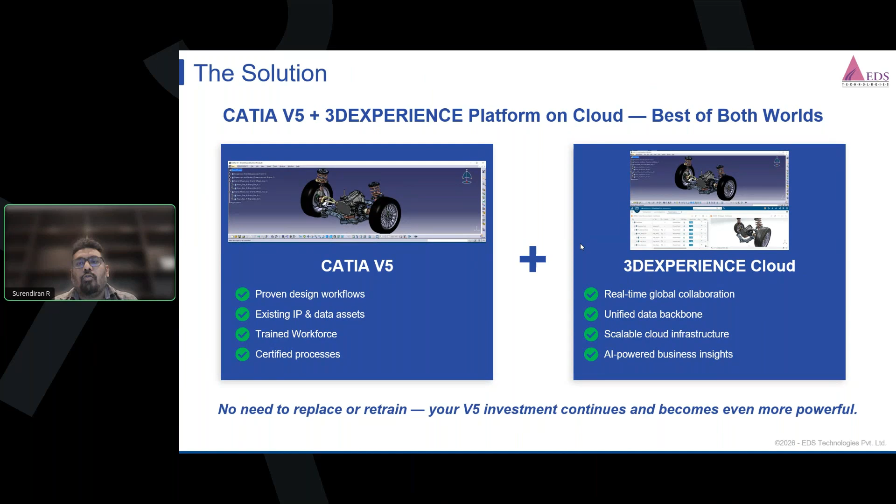Rather, what happens is you currently have only CATIA V5. You're going to make sure you have the best of both worlds, combining CATIA V5 and the 3D Experience platform on the cloud. So there are five key business value pillars I would like to highlight here - why you should connect your CATIA V5 to the 3D Experience platform, and the business impacts and outcomes you're looking at.

So when you want to do a real-time co-design across sites, across suppliers, or across customers, or even within your teams, directly within CATIA V5, you can basically bring a single system, ensuring that you will have unified data rather than working in silos.

And of course, in terms of your process optimization, like your design reviews, approval process, your change management, all these elements are embedded within the platform, making sure that your work is increased in terms of 3x speed.

Next, if you want to understand traceability - a lot of data is built every day in your company. You need to understand the level of traceability you have, how you protect and manage your IP. All these elements are well managed on the cloud, eliminating version and revision chaos. You can understand who has done what, and who has ownership of the data they've built. So completely, you have 100% data traceability on this platform.

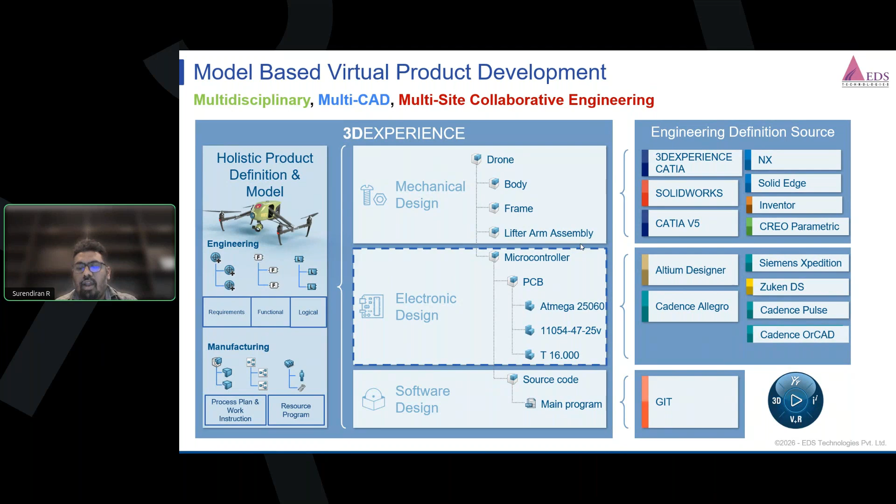So as I emphasized about connecting multi-CAD applications to the platform, what do we call this strategy on the 3D Experience platform? As I said, to have a collaborative engineering definition, that is having a unified BOM. So all these applications are connected to the platform through a power-by strategy.

We have already built-in connectors. What you have to basically do is that today you already have the connector for CATIA V5 within your CATIA V5 with cloud services license. If you want to integrate any other CAD applications along with CATIA V5, you just have to have these connectors.

I believe you might have got some information about what CATIA V5 does with 3D Experience Cloud. Now, before we get into a use case demonstration, I want to show you a short video about what CATIA V5 does with 3D Experience on cloud.

In this segment of video, you'll be seeing how you can save and revise your data with the cloud services. If you see here in this video, you can discover the capabilities of the platform.

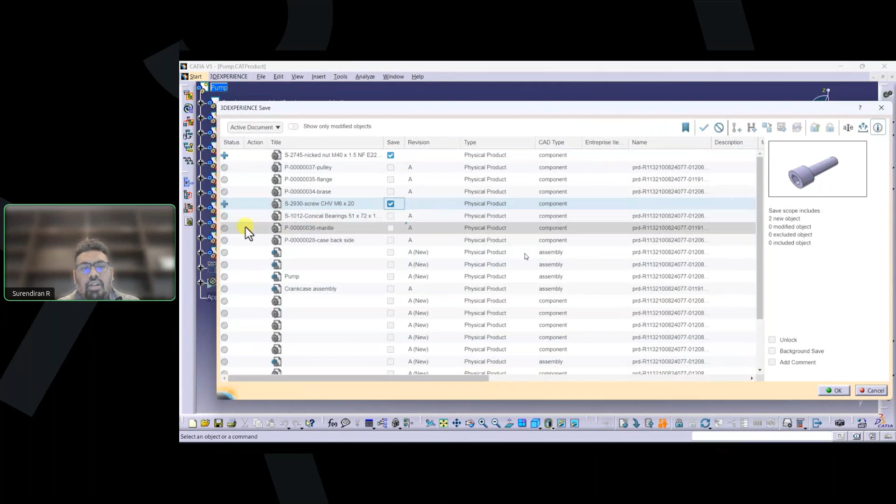If you want to save this file to a particular location, you can organize it to a dedicated folder as well. You can create a structure hierarchy of folders, select the files whichever you want, and save it instantly. It will be automatically saved to the cloud, and you will have live synchronization as well.

What basically happens is that whatever you're sharing or saving from your standpoint, the other designers connected to the platform will automatically be able to see everything.

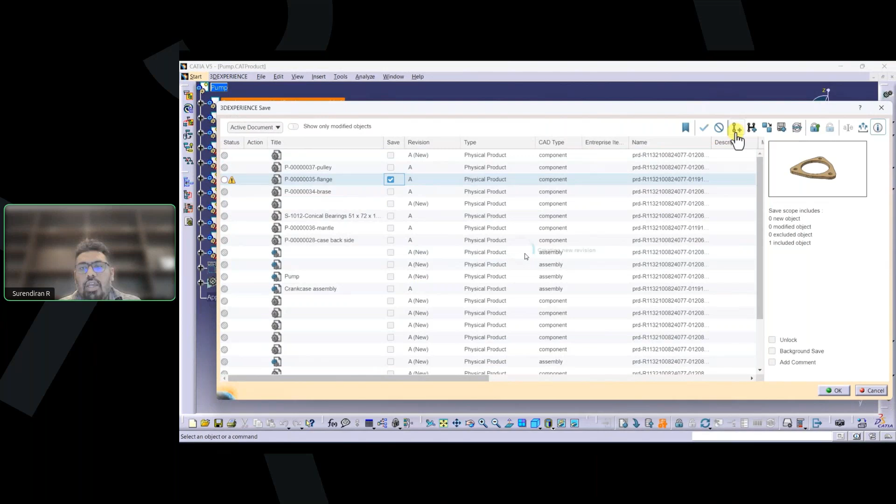Here, if you see, you can also create new revisions. So once you want to create a new revision, rather than having multiple files in your local computer, you can have new revisions here itself, and you will have a maturity life cycle as well. If you want to freeze it for approval, you can do that. You can release it, and do all these kinds of elements on the 3D Experience platform.

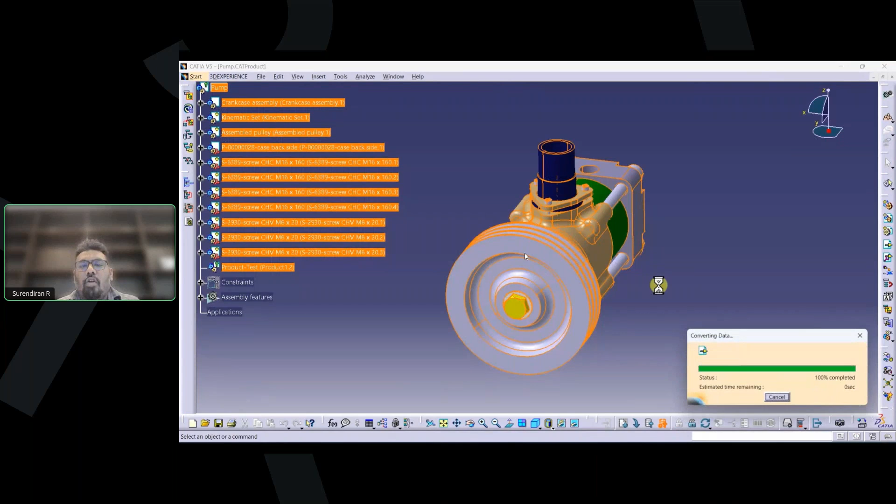It also enables you to avoid duplication of files. You can lock the files while you're editing, and unlock them when you're sending them back to the database. This will also enable you to generate derived outputs such as STEP, IGS, CGR, which is required to be shared with your suppliers.

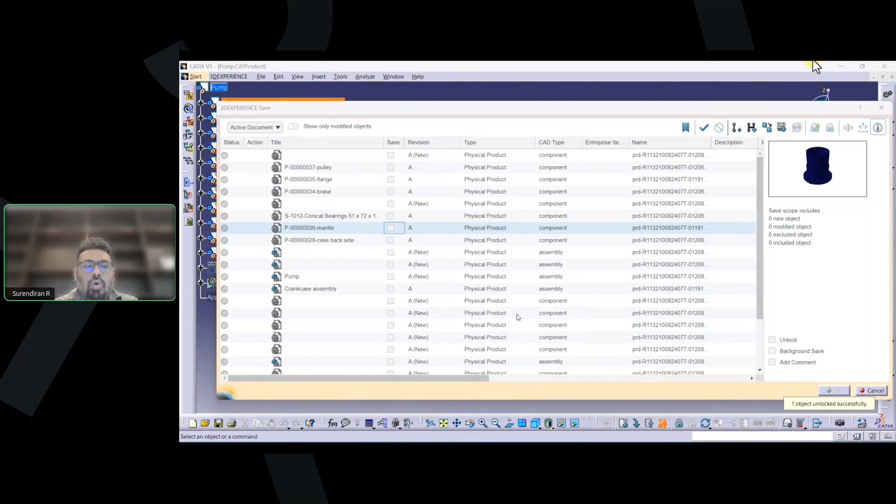Once you save this, you can see the progress of the file getting into the platform, and you'll have a message stating that all files are saved accordingly. While you see here, this is how the interface remains. It will be beneficial for you to work on the platform, and you can save all the files here to the 3D Experience platform as well.

But when you want to search and open a product, whatever you've done in CATIA V5, in local computers it will be hard for you to retrieve information. Whereas here, we have a powerful semantic search.

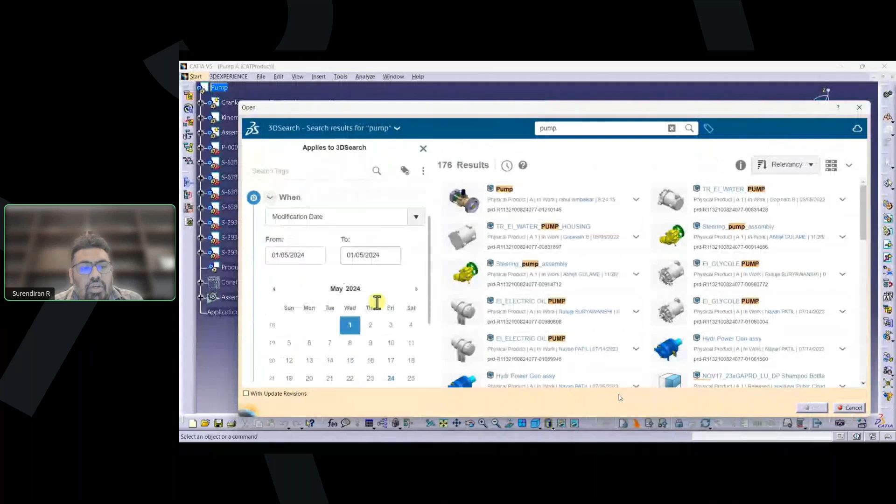You can filter it based on different information, whether which CAD applications you have built, whether it's CATIA V5, 3D Experience, whatever it is. You can also filter information based on CATIA V5 releases, whether it is 23, 26, 25. You can also check the dates as well.

You have the opportunity to even search this on the web interface also. When you open the 3D Experience web interface, you can also find this information here, and you can instantly open this element for design with CATIA V5, so that all elements can be instantly opened in your CATIA V5 interface.

It's also important that you understand how you organize your data. You can have a lot of data and powerful search capabilities, but it's also important that you create a folder structure hierarchy. This will enable you to easily find the data that is required.

Here, if you see, you don't need to manually upload. The system is already capable of finding it based on the attributes you have defined, and instantly you will have all the files there.

Finally, in terms of modifying the data and revision, it's as simple as that. When you have multi-site collaboration, with multiple people working on it, you see how it behaves between user one and user two. You will have information about how this has been locked by other users, and how easily you can create new revisions.

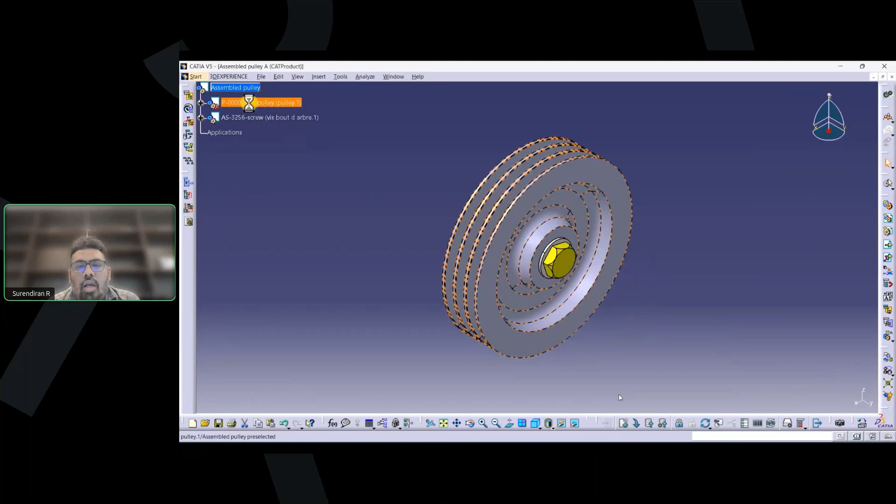This will enable you to avoid duplication of the file, ensuring that all elements are well aligned in the design, whatever you're doing.

If you want to do any replace with your revision, from the 3D Experience platform you can understand how many revisions are there, whether it is A, B, C, whatever it is. Through these connected workflows, you will have all the information.

And of course, if you want to review, all users and all designers who want to review the product structure, it's as simple as that.

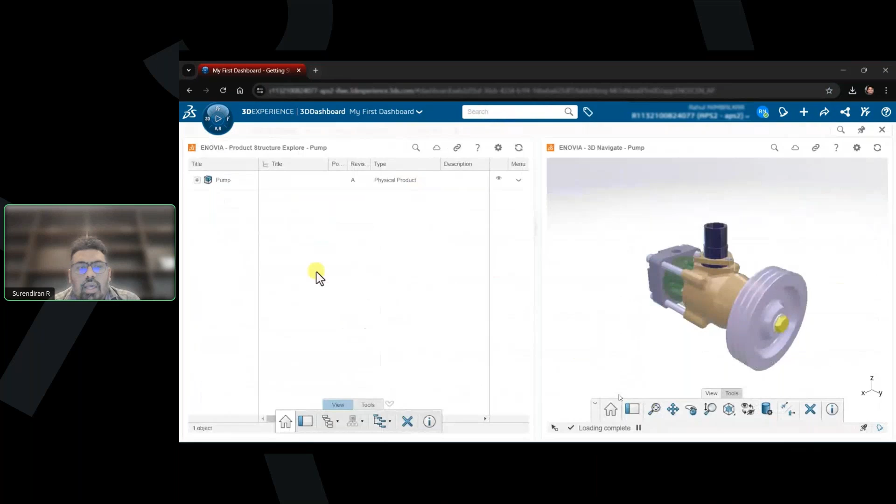You can see we have a tight interface on the cloud itself. Rather than opening CATIA, you will also have lightweight visualization towards the right side, ensuring that all information is available towards the left side in terms of structure. And if you want to visually view the 3D, you can also do that.

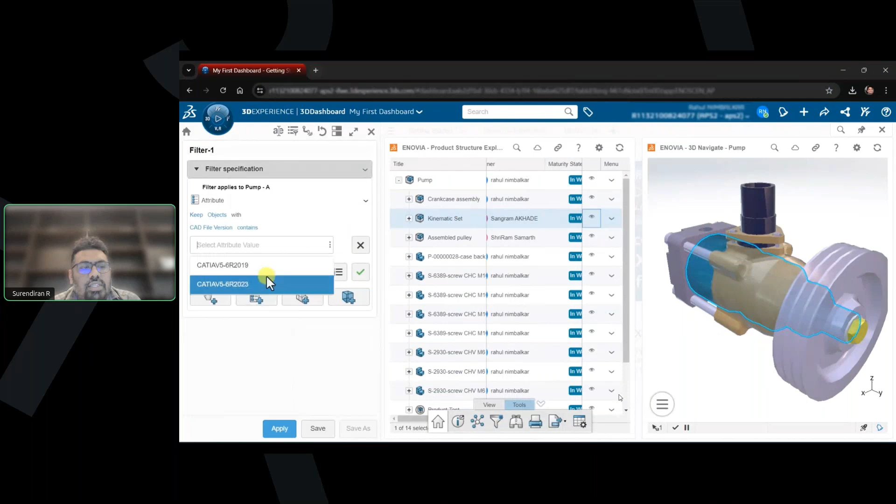You can see here, if you have integrated multiple releases of CATIA V5, even that is possible. Whatever the CATIA V5 releases you have, you can instantly understand - for this particular OEM, I'm using this version of CATIA - so that you are intact in terms of what is required for your execution.

The one which I showcased now is basically a generic video of how CATIA V5 integrates with the 3D Experience platform. But I would also like to run through a use case.

Here, exactly how the CATIA V5 and the collaborative tasks participate or work in tandem - you'll be seeing how we have task-driven design development.

If you see here, this is basically a designer workflow. From here, we can see how the manager will participate in terms of review and approval.

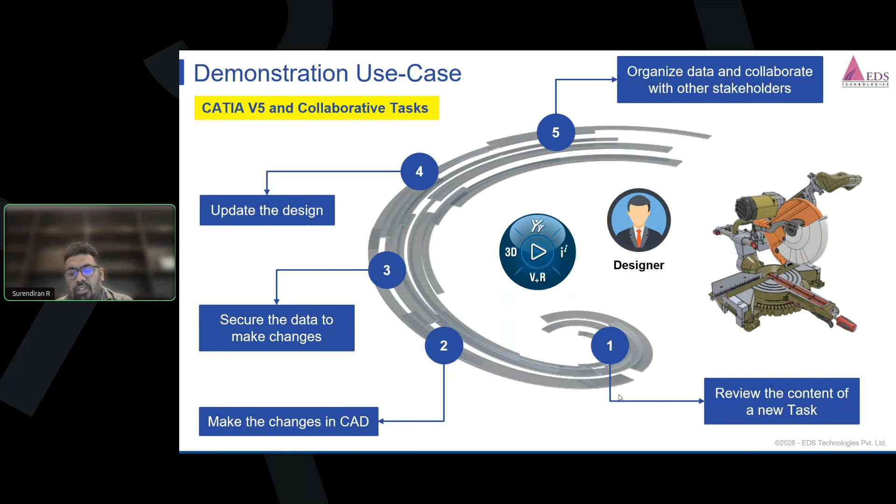And finally, we can also see once a change management comes, how change management also works in this regard. So in this video, if you see here, the designer is still in the CATIA V5 interface.

You can access the task assigned to him through the 3D Experience pane that is available. Once he opens that, you can see all information in terms of description and what is required - everything is given here. There is a design review that is already done and an image is attached, and you can also see a similar competitive solution.

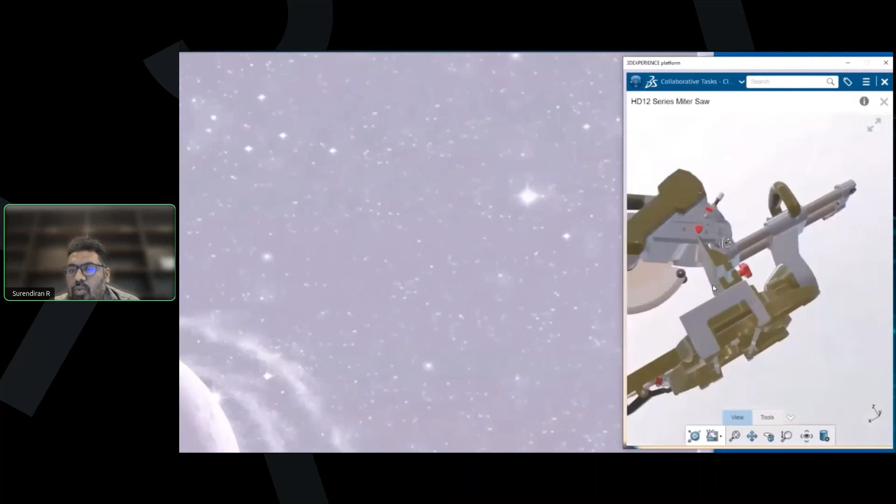And of course, if you want to see the 3D visualization of the CAD element without opening CATIA, you can do that as well, as I said. Now what happens is that you have to design an element as per the instruction given by the manager.

You just need to drag and drop the file into the CATIA interface. You see here, your CATIA file is available in the CATIA V5 interface, and you will have a 3D Experience pane towards the right side, which will have all properties.

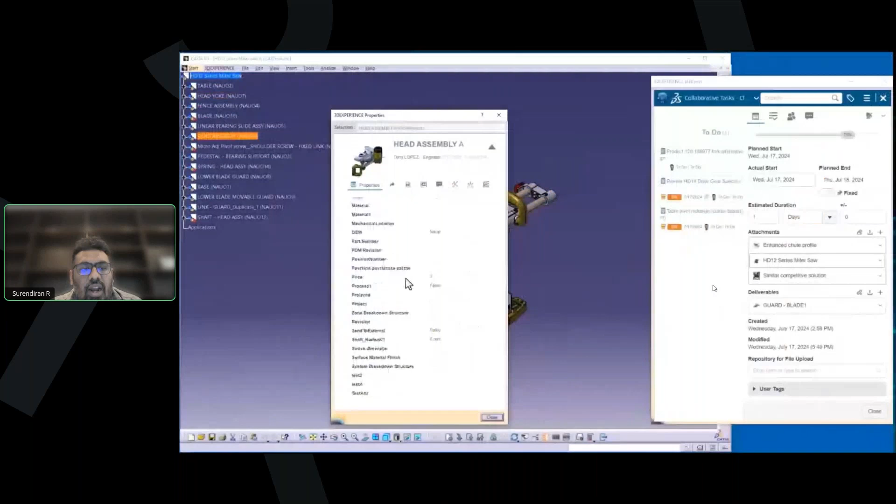In terms of part numbers, whatever attributes you want to define, the derived outputs you want to generate - everything will be intact within the CATIA V5 interface itself, rather than migrating elsewhere.

Now, if you would like to do some kind of modifications, you can lock the file. Locking will ensure that there will be no duplication once the other user opens it.

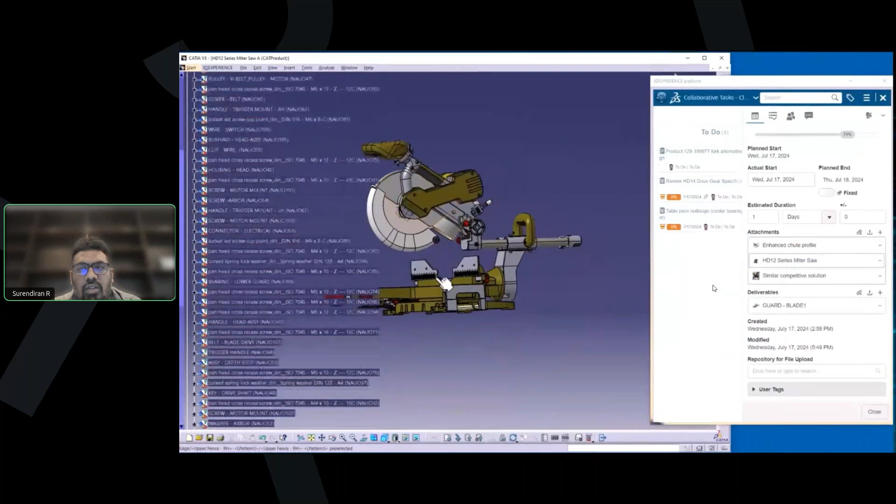You can also check the relationship between the different elements, how many revisions are there. This is basically the traceability.

Now you're going to basically design an element here. You can start your regular CATIA V5 workflows using your surface design modules, whatever it is.

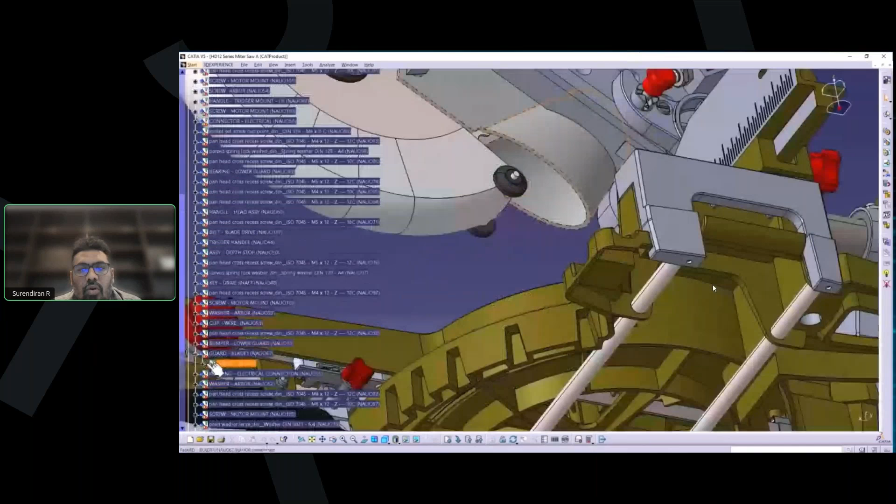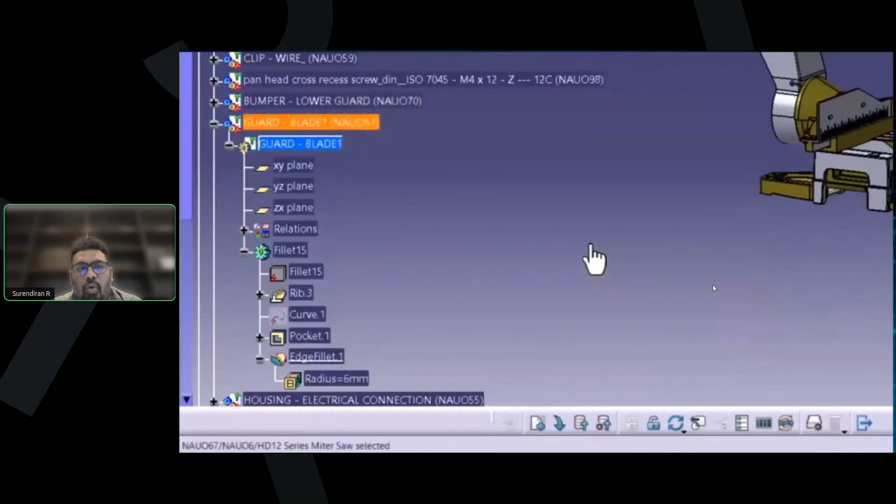Once your modeling is completed, you ensure that the functional form and the aspects are completed. Once this is done, you can use the save button. Once you save this, the data will now be available on the platform, and you can freeze it for approval from the CATIA V5 interface itself.

So you see a lot of actions have been done, without navigating to a different application. Whatever bracket you define, you will put it as a deliverable and save it. You can also put across comments, so if you want tight traceability of who has done what and the comments, that information is also available here.

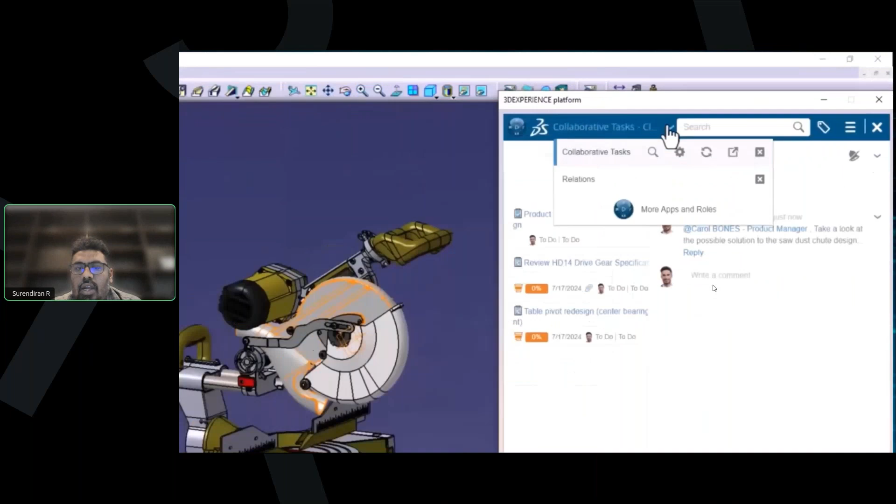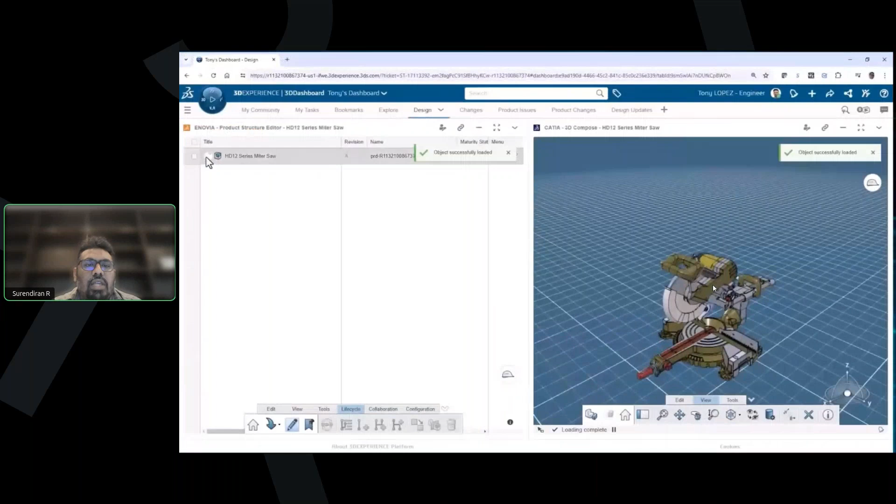So without getting out of CATIA V5, you can use the 3D Experience capability integrated within the platform and CATIA V5, and save all this information here. Without taking out your investment, this is going to make your CATIA V5 workflows more powerful, ensuring data management capabilities and collaboration is well established between all designers in your company.

I hope this was intuitive in terms of understanding how the different actions were done by the designer in revising, creating a model, saving it, and organizing. We will also see the next thing in terms of change management as well.

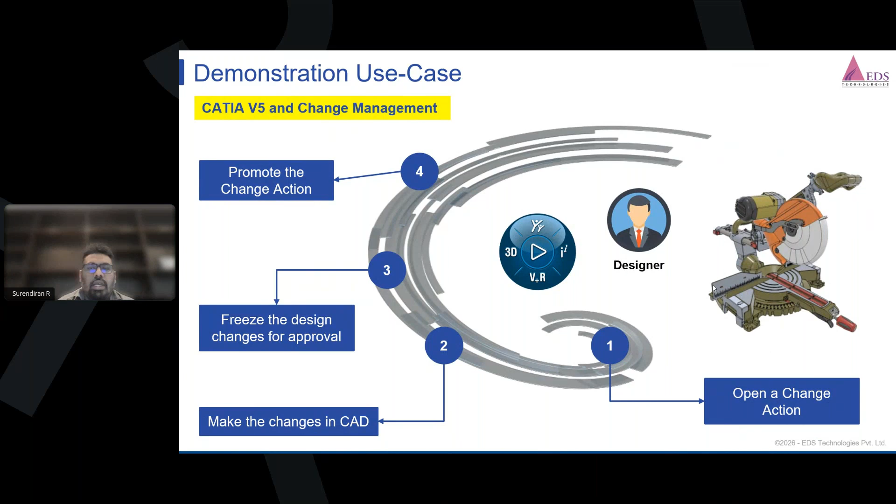Let's say a designer has designed an element earlier, but now you have received a change request from one of your stakeholders or managers. Here you need to understand how the change management works. It's going to be pretty similar here. You can open the change action interface from CATIA V5 itself, and whatever you want to change, you can put across in this interface.

You can do a design review in the platform itself, and any kind of annotations and reviews can be done. Now if there is a modification to be done, you can activate the change management within CATIA V5.

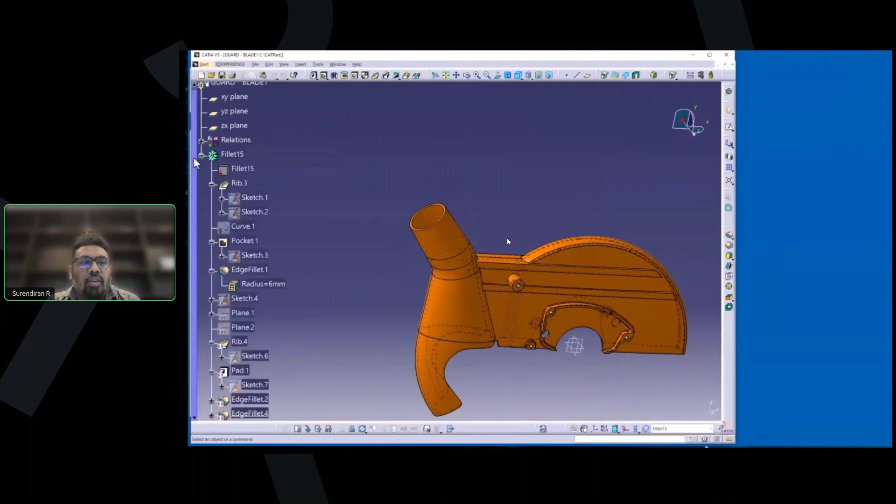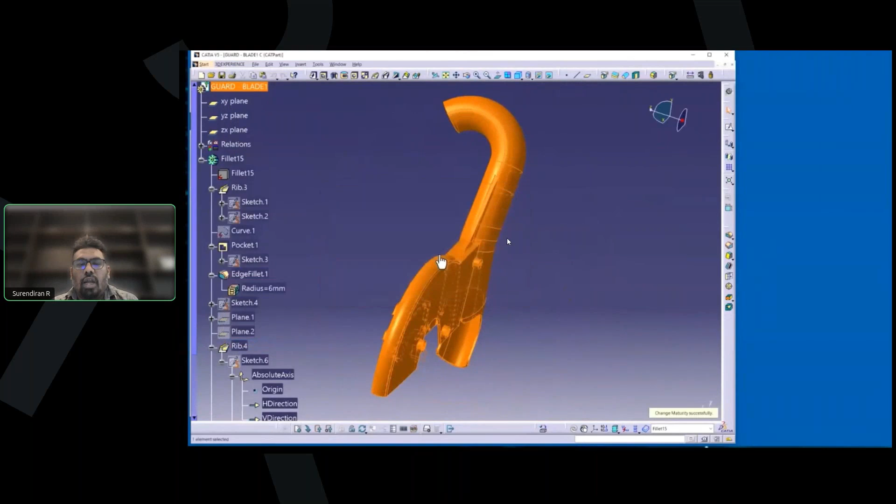You can go ahead and do all the necessary changes in your modeling, whatever you want to do. Once you've done your modeling aspects, the platform will capture the history of changes you've made. It's not only capturing the history of changes, but once this has been locked or frozen, it will help others understand that this file is already being changed and is waiting for approval.

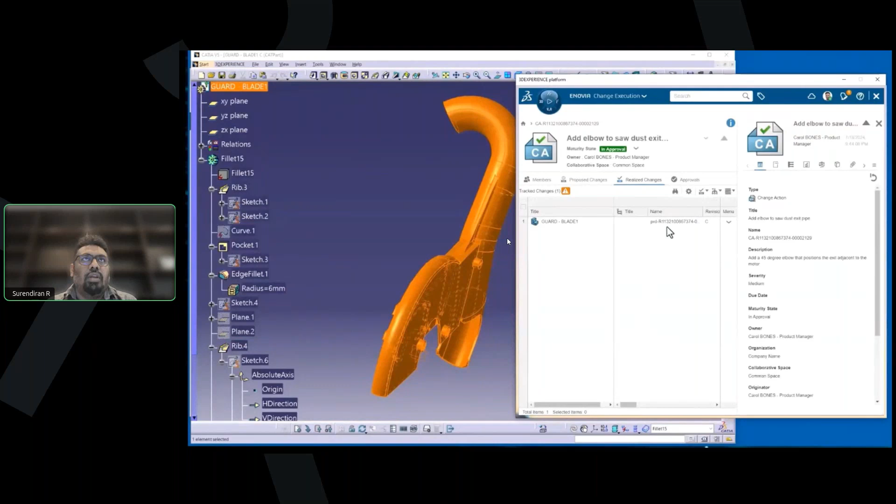This is going to be pretty simple here, not a complex workflow. It's just drag and drop capabilities. There are two tabs available: proposed and realized changes. Proposed changes is basically where your manager puts across what needs to change, and realized changes is where whatever you have modified will be automatically captured and frozen for approval.

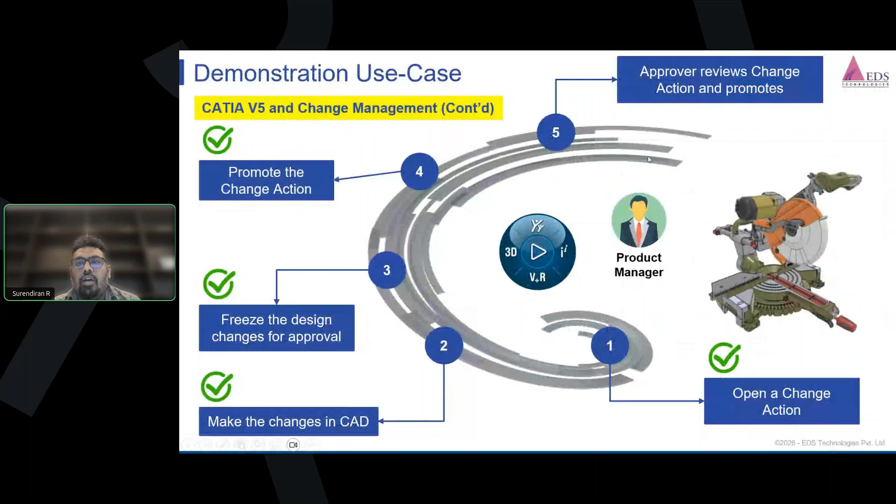In this scenario we've seen how it's been done. Here the product manager will play his part in approving the change. Now the modification is well done, so what he basically does is open all the modifications.

Here he'll basically open the realized changes to understand what has been done and who has done it. If he wants to move it further, you'll have an approval workflow available here.

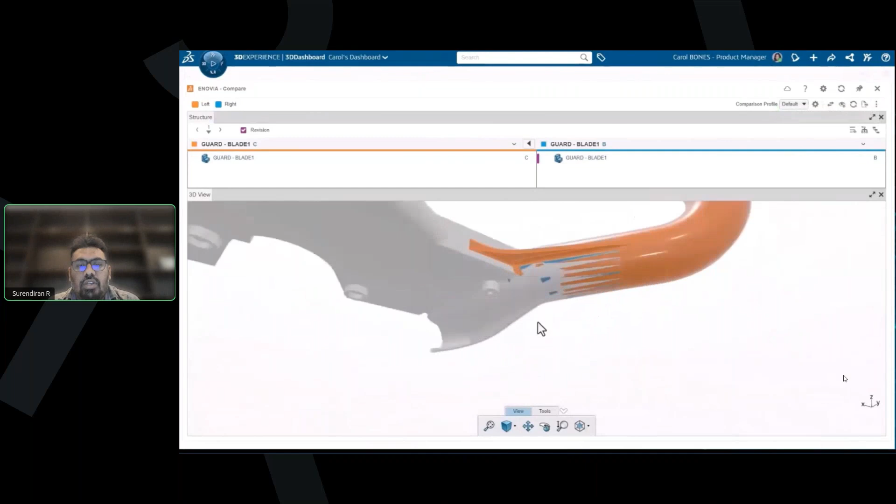You can put a series of people to understand the approvals, and you can also visually compare the revisions as well. I'm trying to see what was there in revision B to revision C, so you can see the superimposition of the element available from the earlier bracket to the latest one.

If you want to approve this, we have the comments-based approval system available along with a digital signature as well. Once this has been approved, the file will be automatically released, so whatever elements you saw earlier, now it has been redesigned.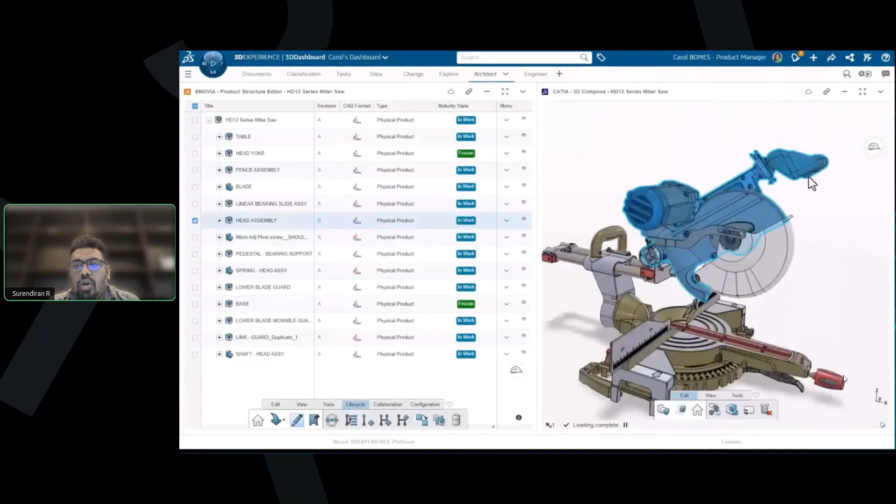Okay, and all its statuses in terms of the latest revisions, everything will be updated here as well. So ideally, you can work collaboratively with all your design team members.

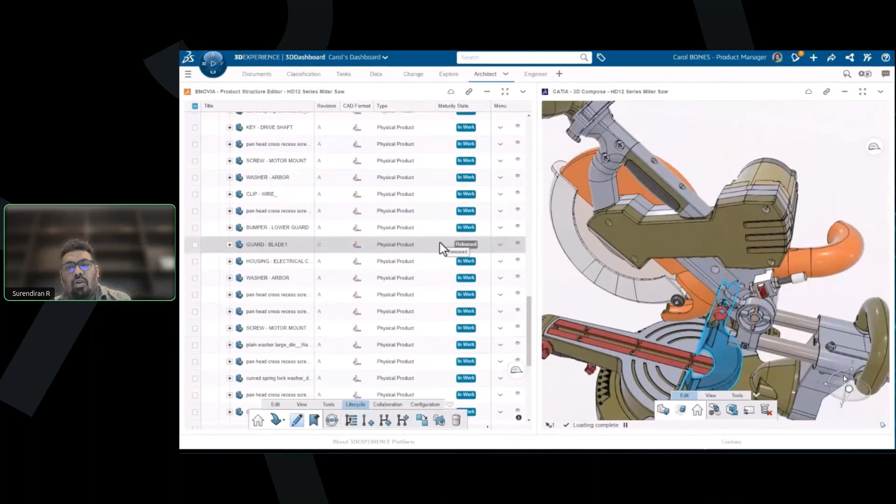The next one is basically how you can manage your review process, your approval process, how you can define your bill of materials intact without any duplication. Most importantly, if there are any changes, not only inside the design team but from different teams, you can effectively manage all design changes through change management on the platform. These short use cases help you understand how you can have a connected design workflow.

Definitely there are a lot of additional things you can utilize within these licenses. We can also have a one-to-one session if you're interested in understanding the capabilities on the cloud, collaborating with V5. Definitely we are up for it.

But what happens if you implement this solution? What is it that you're basically going to get in terms of return on investment, and what are the measurable business impacts?

As I said, the first one is time to market, for all the stakeholders and companies here. So ideally, you can reduce or optimize your processes, ensuring you reduce your time to market.

Your change management or engineering change orders, whatever you're executing today manually, with a digital system enabled, you can accelerate the process 3x times.

Most importantly, if you want to implement this solution, you need not invest in any IT hardware infrastructure costs. Rather, you have this scalable cloud platform, which will save you around 30% of your investment for IT. This platform is always up, and you don't have issues while working - you have an uptime SLA of 99.9%.